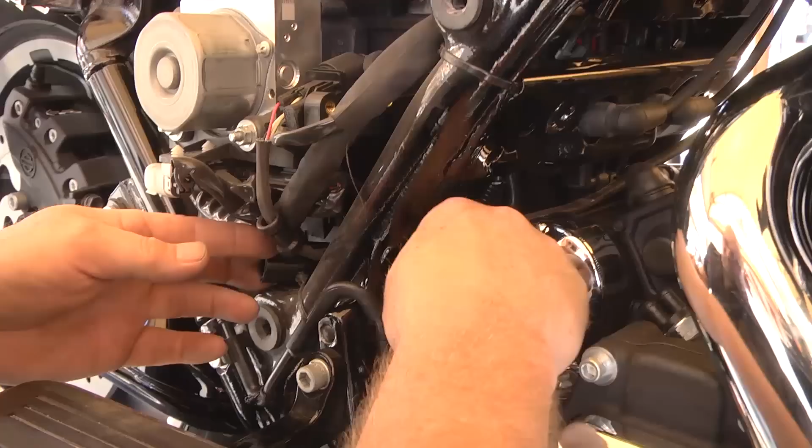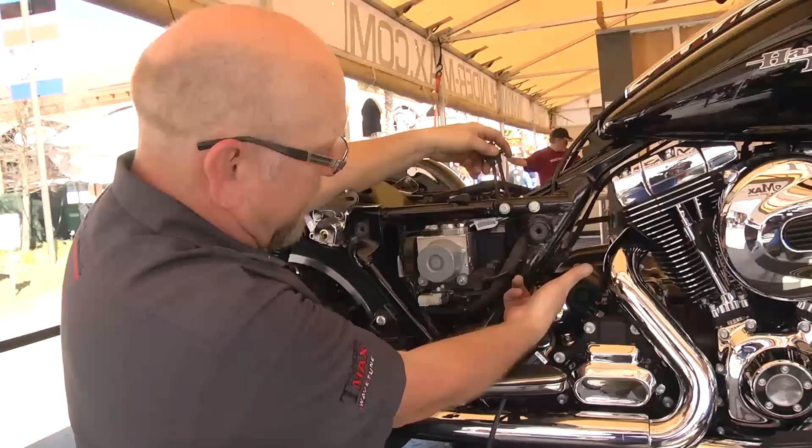We have removed the bags, the seat, and the side cover so we can get to this area on the right side of the bike. We've also installed our O2 sensors, routing them between the transmission and the starter, coming out right in the side cover. Next, we're going to do the O2 sensor connection to the module, routing it between the frames here, coming out the top, and wrapping it around to where we can get it to the ECU.

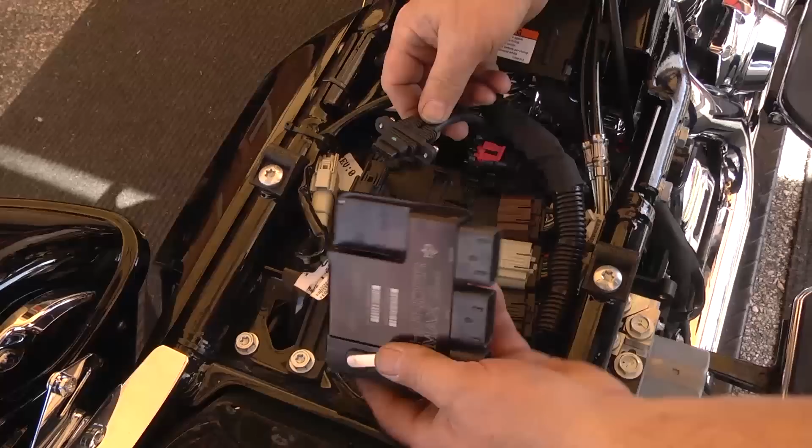Pretty simple so far. Now we're going to install the ECU. This is your O2 harness, it's going to plug in right here. There are 2 screws, you need a Phillips screwdriver to tighten them. It's easier if you put this in first. You don't want to run them in too far, but you want to get it to where it's compressing the rubber just a little bit.

That's good right there. Next thing you want to do is plug them in. It's a 3 connector, so if you start one and grab the next one and do it in sequence like that, and then snap them in place.

There you are, there's a little lip right there as you can see. What you want to do is slide the ECU up as far as you can to that, and grab these 2 clips on the edges. You can press it down in there, but I prefer to pull them back so you don't end up breaking the tabs. Nice and tight.

At this point now, I have to connect the O2 sensor harness to the O2 sensors. This is a nice little area in here to hide your connector. So if you want to take the rear, which tells you the rear, and just slide that inside this cavity, there's your front or your rear O2 sensor and your rear harness, and you just slide them together and listen for the click.

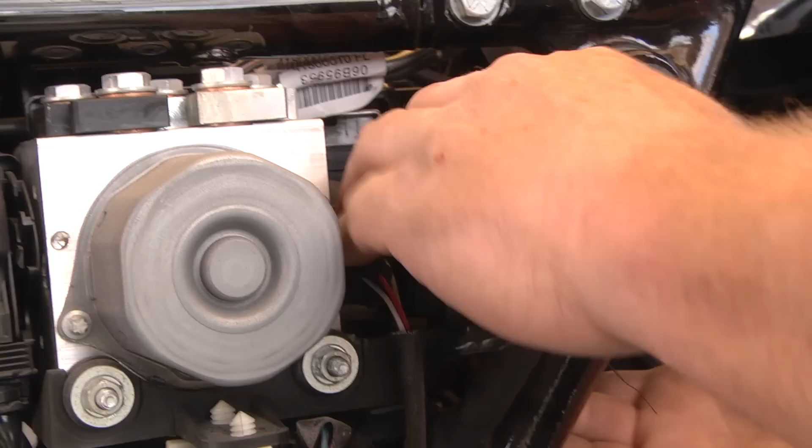This one's really nice because it gives you a nice place to saddle your connector right there, and you want to take a zip tie and just zip tie that in there.

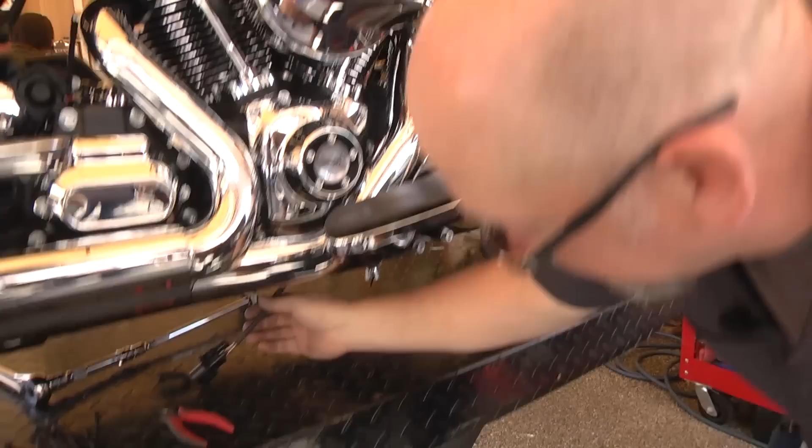All right, now we're going to go to the front sensor, and we're going to route this front sensor in between the frame down to here, and we're going to bring it back and let it hang right there for a minute. Then we're going to bring our front sensor that we've already run to there.

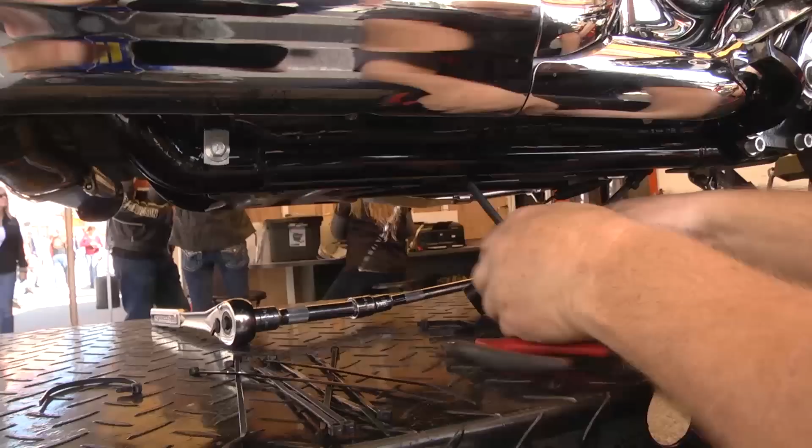All right, you're going to plug your O2 sensor into the O2 sensor harness. You can hear the click, that means you've got a good solid connection.

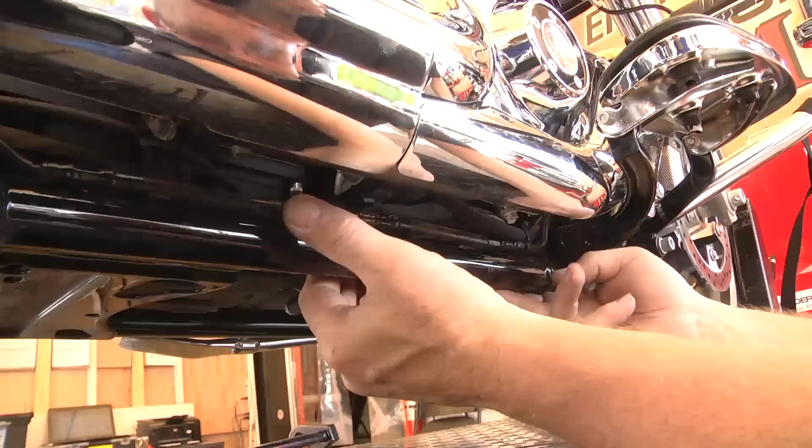Next, what you want to do is tie it up in the frame somewhere. You can pick you a spot, sometimes it's hard but sometimes it's easy. Once you get it up high enough to where you're 100% sure you cannot drag it, get it on a trailer or going over a rock or whatever trail riding, you want to keep this tie on the inside of the frame. So if you do drag the frame, you don't cut the tie and the connector falls down and you end up running over the connector, and then you have to call tech support because your bike's not running good.

There, nice and tight. Next, we want to tie this up here. If you do it nice and loose to where you're not going to stress it, it should be okay. So you just take your zip tie and get it started and let it slide down just a little bit right here, and maybe one more right here at the top to make it nice and neat.

At this point, the installation is mainly done. So what we need to do is step up to the next step, and that's adding a program to the module and getting it running.

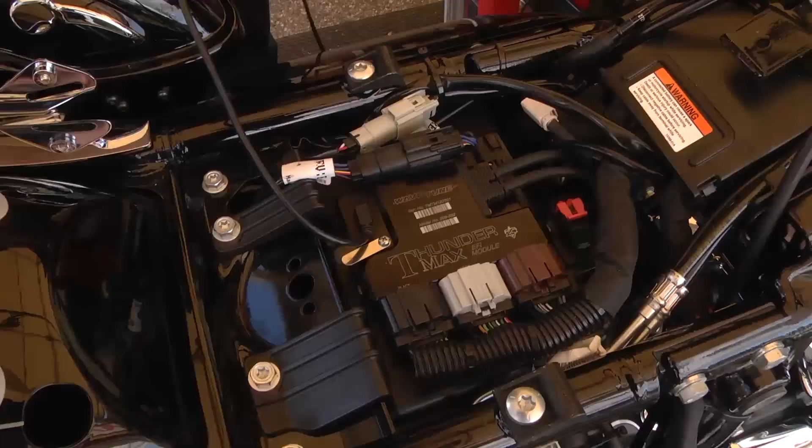When you receive your Thundermax, you get the software, and you also get a communication cable. It's a USB, mini USB to USB. Next, what you got to do is you got to pick a map for the bike.

Go to EFI Maps, right click, depending on your bike, whether it's throttle by wire or throttle by cable, gives you the choices. Pick the correct one for your bike. In this case, it's throttle by wire, and that's going to bring up all your maps.

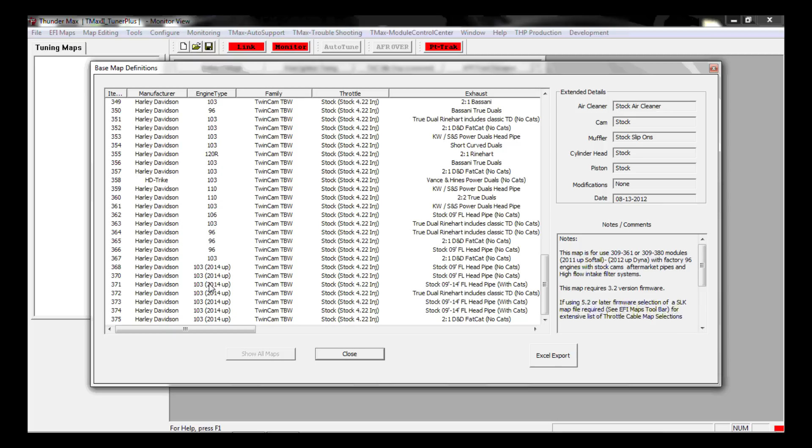And you go through your listings until you come up with your configuration. In this case, it's a 103. If you right click, it brings up all the 103s under the engine type.

That's going to bring up this window. At the bottom where it says load base maps, I'm going to click that, and it's going to put the map in the background, and you close this window here. Now you've got the map on the computer.

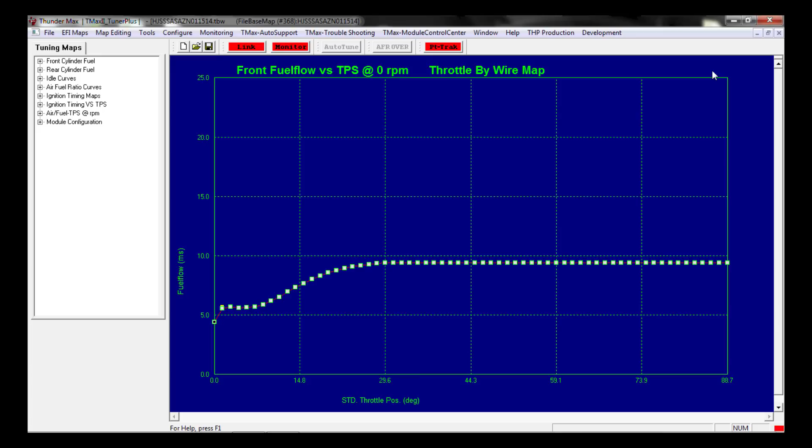Now let's put it in the module. Turn the key switch on, and this will link.

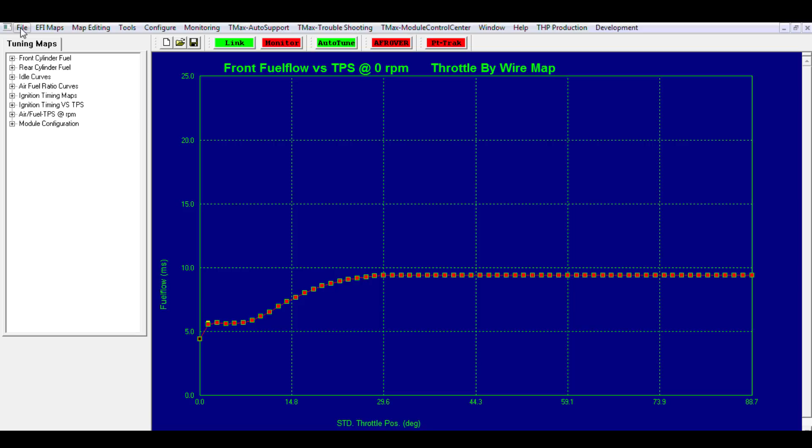All right, we've chosen the map that we want to use. You go to File, Write Maps.

Another window will open up, and you want to write it to running position. Click OK, and it loads the map. Just make sure you don't rush it and you let all the windows complete.

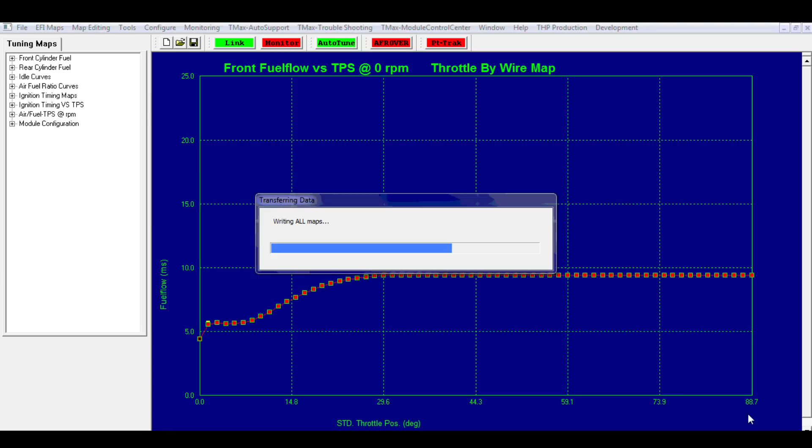Now at this point, we need to initialize the module, and how we do that is just turn the key switch on and off for about 20 seconds. That needs to be done 4 times.

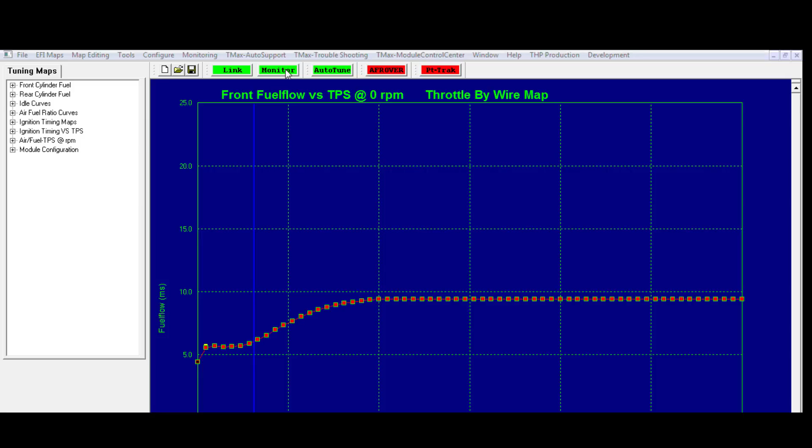You can watch your screen when the link goes away, then that's pretty much 20 seconds. So if you just pay attention to that, on and off. Okay, we're ready to start the bike.

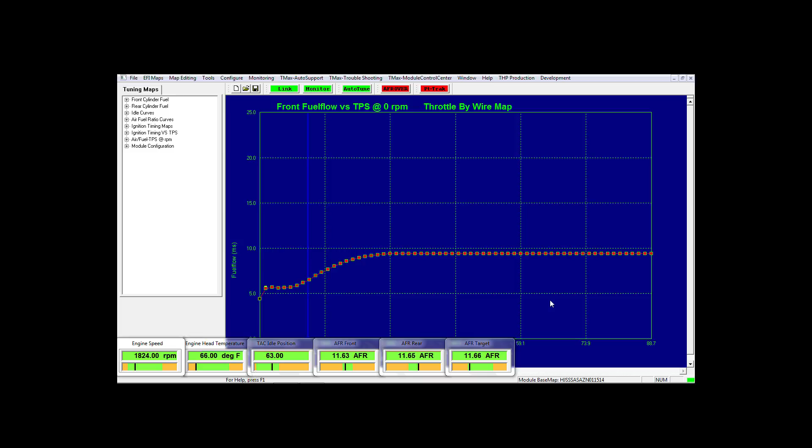If you watch your AFR targets, your front and your rear are trying to achieve that value.

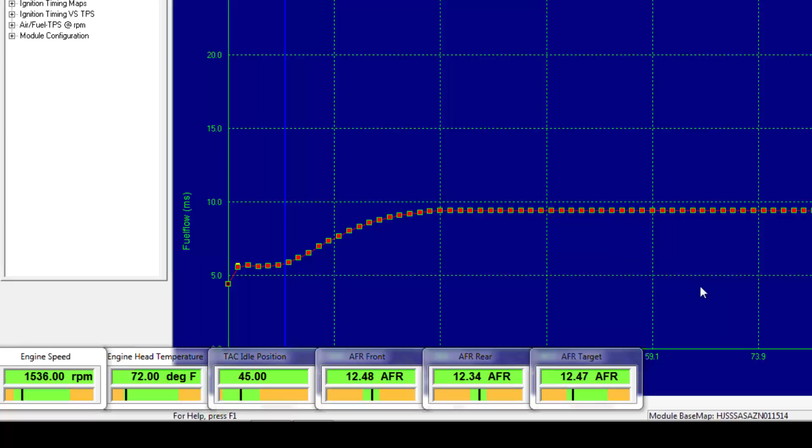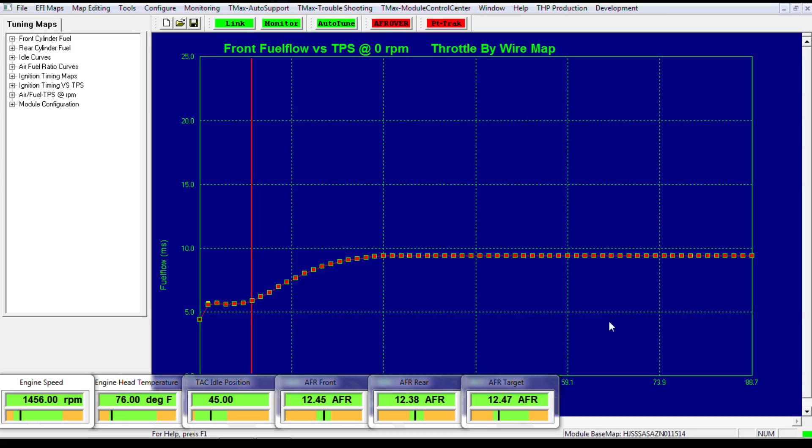Now this thing will tune, but they're not permanent until it gets to 200 degrees. Once it reaches 200 degrees, then it'll start making permanent offsets. So right now we're just going to let it warm up to 200 degrees.

Once it reaches 200, it's going to actually make permanent points. This is your offset. The green point, your red mark, is your base map. These will always be here, but once it tunes, it'll make a movement up here.

You'll see, as you go back and view your maps later on, that these green points are all through your map.

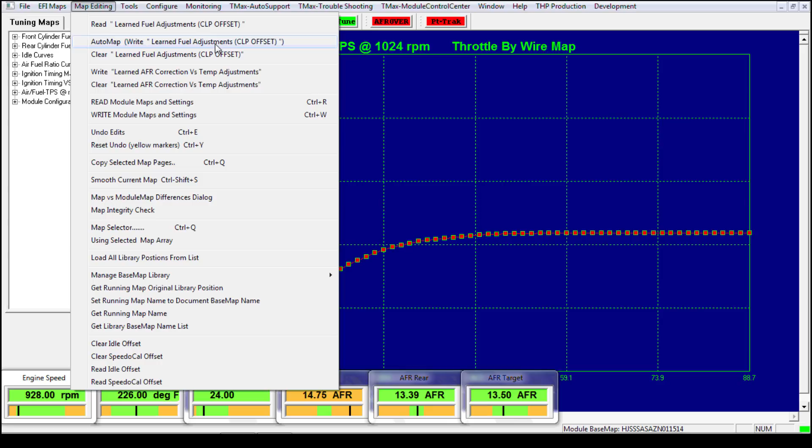At that point, maybe 2 to 3 weeks, you might want to go in and do an auto map, which is this right here. We don't have enough points right now to do that, but later on when you go back and view your map, you want to go and look at this and perform that.

What that does is all these green points now is going to be your red points, which is basically making a custom map for your bike.